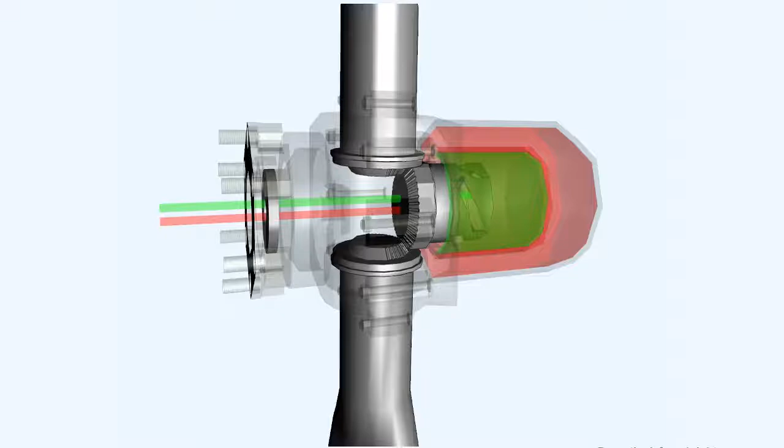Alternatively, the type of control system shown here has a similar pitch change mechanism to the single-acting propeller. Like the single-acting propeller, its pitch change mechanism is also mounted towards the front of the hub, and the cylinder also contains a hydraulic piston. However, in the double-acting system, this piston will have hydraulic pressure directed to either side of it.

Fine pitch oil is sent to one side of the piston, or coarse pitch oil is sent to the other. This eliminates the need for coarse pitch springs or gas pressure, and, with the exception of some larger propellers, the assistance of centrifugal counterweights.

The double-acting propeller's controller will respond to the various demands made by the pilot regarding the propeller RPM to control the oil flow to either side of the piston in the pitch change cylinder in three ways.

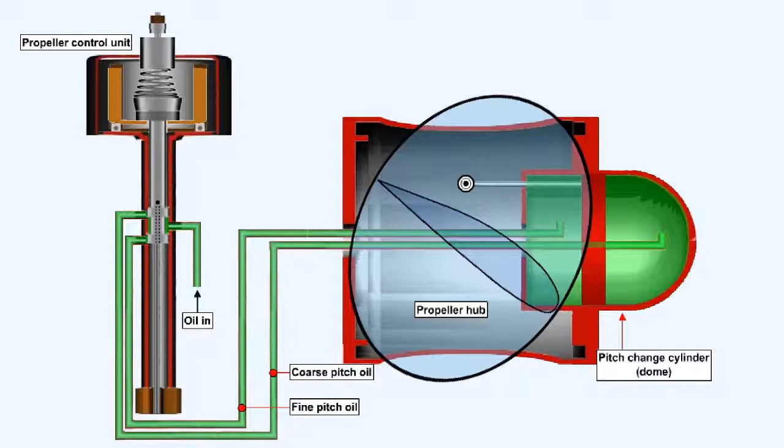If the propeller is underspeeding, then the flyweights will be leaning inwards because of the reduced centrifugal force, allowing the speeder spring to push the landed valve downwards. This will allow the unit to supply oil to fine off the pitch of the propeller, while simultaneously porting coarse oil to return. The piston will move to fine off the blades, causing an RPM increase.

If the RPM is as required, in other words the propeller is on speed, then a hydraulic lock is formed which traps oil both sides of the piston, maintaining the blade pitch constant.

If the propeller is overspeeding, then the flyweights will be forced outwards by centrifugal force, compressing the speeder spring and allowing the landed valve to move upwards. This will simultaneously allow coarse oil to be ported to one side of the piston and fine oil to drain back into the engine from the other side. The piston will move to coarsen the blade pitch, causing a decrease in RPM.

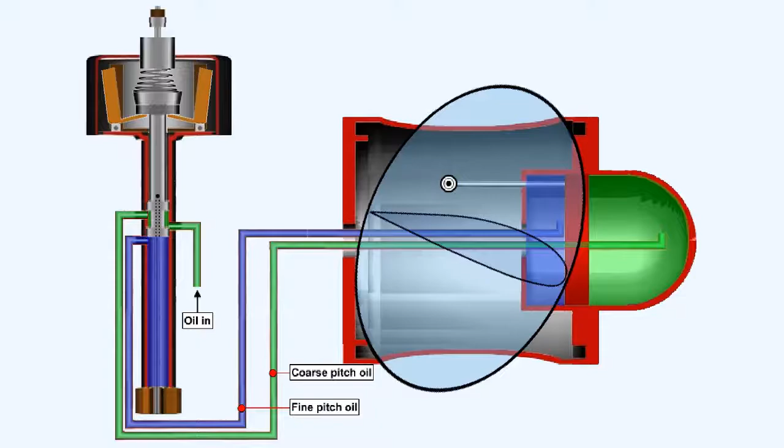A constant speed propeller must be capable of all the pitch change operations mentioned previously, as they are selected by the pilot moving the RPM lever in the cockpit. The system must also be capable of maintaining a selected RPM within its own operational limits, regardless of changes in airspeed, altitude, and engine power setting.

When the constant speed unit senses that the RPM is as has been selected, the system remains in a static state. However, any change in airspeed, altitude, or engine power setting will result in a tendency to either increase RPM above or decrease RPM below the value selected.

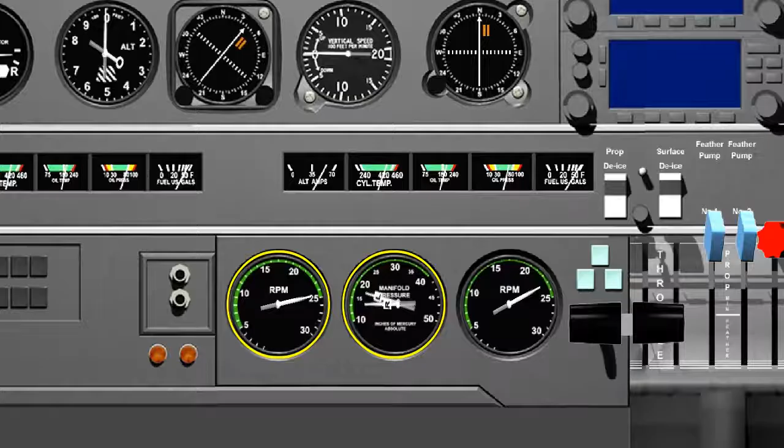As we've seen already, a tendency for RPM to increase, an overspeed condition, will be countered by a supply of oil being fed to the coarse pitch side of the piston in the pitch change mechanism. As is shown in this animation, the pitch will then coarsen and propeller torque will rise as a result of the increase in the blade angle of attack. Propeller torque now exceeds the engine torque and will cause the RPM to decrease back to the selected setting.

As the RPM regains its previously selected value, the movement of the landed valve in the constant speed unit, which directed the oil flow in the first place, is progressively reversed until it regains the sensitive position, where a hydraulic lock holds the piston in the pitch change mechanism immovable until the next RPM selection or disturbance in airspeed, altitude, or engine power setting.

A tendency for the RPM to reduce, which is termed a propeller underspeed condition, must be countered by a supply of oil being fed to the fine pitch side of the piston in the pitch change mechanism.

As shown in this animation, the pitch will fine off and propeller torque will fall as a result of the decrease in the blade angle of attack. Propeller torque is now less than engine torque and will cause RPM to increase back to the selected setting.

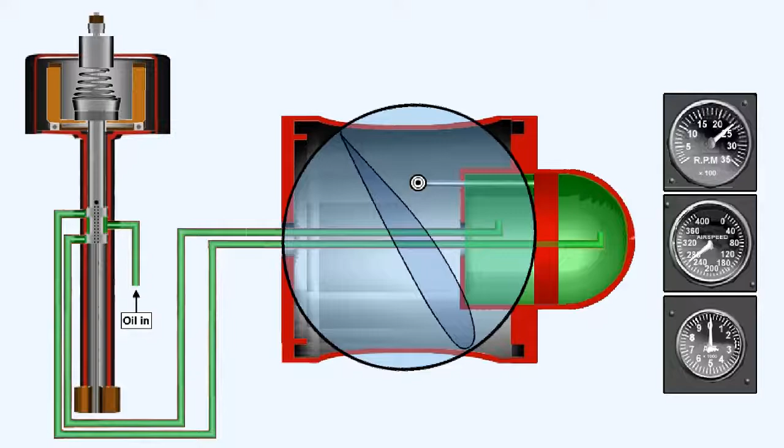Should an engine fail in flight, its propeller control unit would sense a drop in RPM, and in an attempt to maintain the pilot's selected RPM level, would move to the underspeed or fine pitch position. Centrifugal moments acting on the blade would cause it to rotate towards fine pitch.

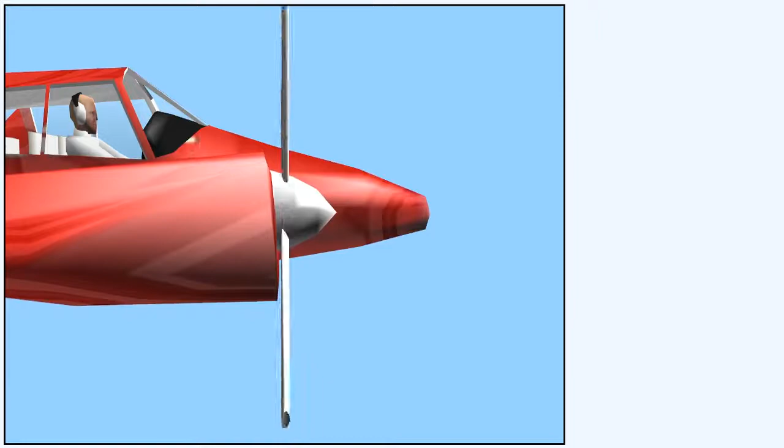This would result in the propeller being put into a windmilling situation, with its pitch change piston abutting the fine pitch stop. The immediate result of this would be a very large asymmetric drag, which would yaw the aircraft violently towards the failed engine.

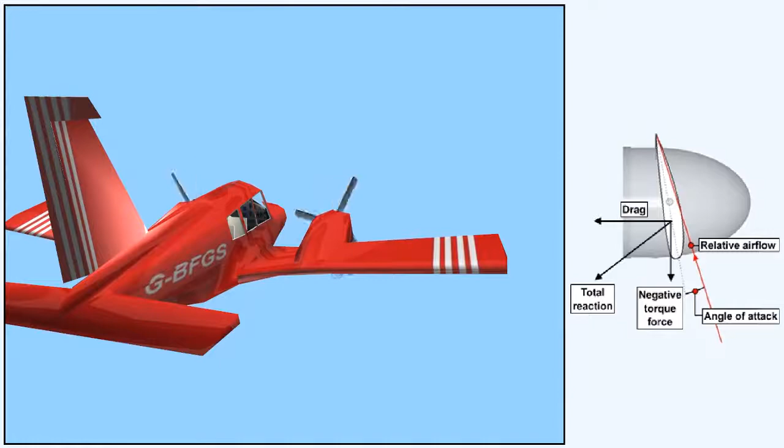A second possibility, if the propeller continued to windmill and drive the engine, could be a complete mechanical breakdown of the engine, and even an engine fire.

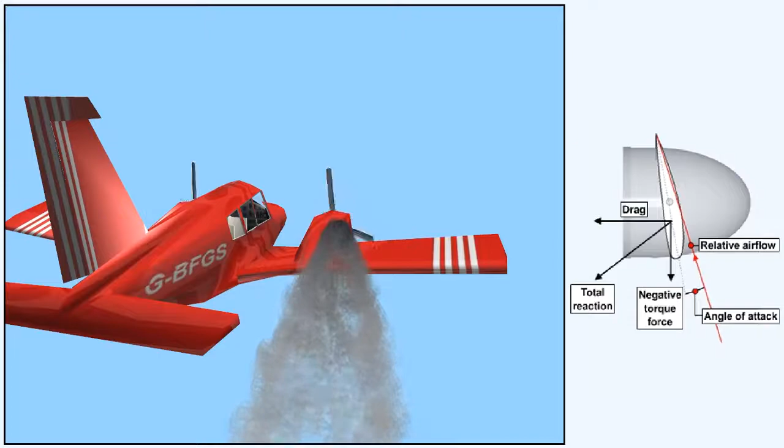So, to minimize drag, and also to prevent further possible damage to the engine and the aircraft, some propellers, particularly on multi-engine aircraft, are provided with a means of turning the blades edge-on to the air flowing over them. In this edge-on position, where no aerodynamic force is generated either forwards or backwards, the propeller will cease to rotate. This action is called feathering the propeller.

If the engine had actually failed, there would be no requirement to unfeather its propeller. However, propeller manufacturers usually provide an unfeathering facility, by means of which, if appropriate, an engine restart may be attempted. This may be a requirement following asymmetric flight practice.

The operating principle of the propeller control unit incorporated in a feathering propeller is similar to that previously discussed, in that the unit contains an oil pump to boost oil pressure delivered from the engine or reduction gearbox, and a hydromechanical governor for RPM control. There is, however, the addition of a feathering mechanism, the operation of which will be discussed progressively throughout the lesson.

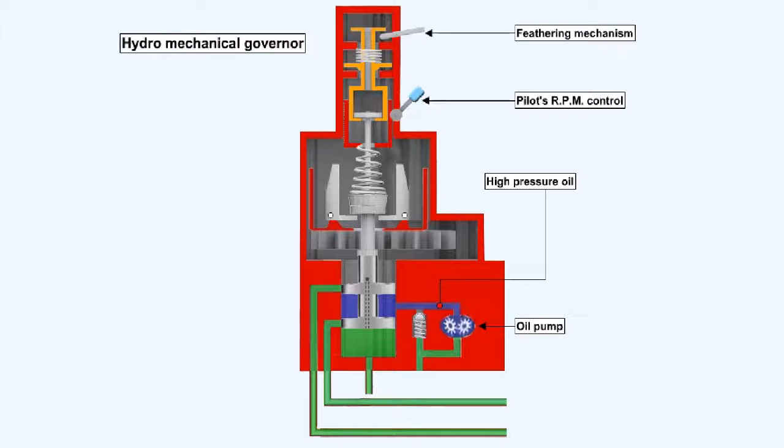Control units with feathering mechanisms may be found on both turboprop or reciprocating aero engines. Dependent on the manufacturer and type of propeller system, the controller may be known as a propeller governor, a constant speed unit (CSU), or a propeller control unit (PCU). For the remainder of this lesson, we'll refer to the unit as the propeller control unit, or PCU.

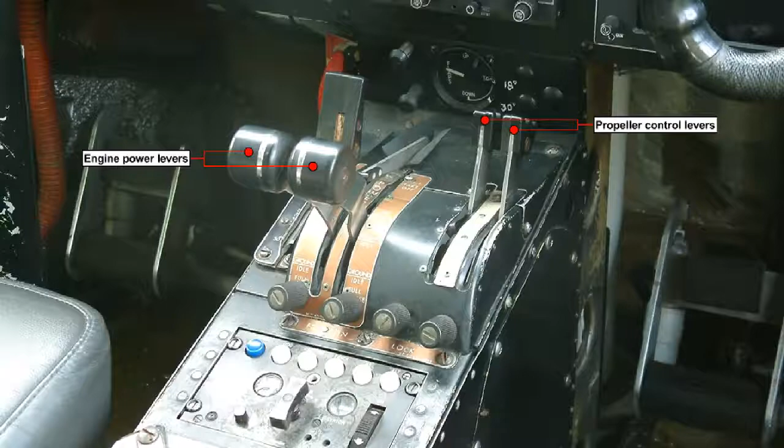The controls available to the pilot are, again, dependent on type. Most spark ignition piston engines, and many turboprop engines, are equipped with a twin-lever cockpit arrangement, whereby the pilot has separate engine power and propeller control levers. In this arrangement, propeller feathering can be manually achieved by moving the propeller control lever to the feather position, or on some aircraft, by means of a separate feather lever.

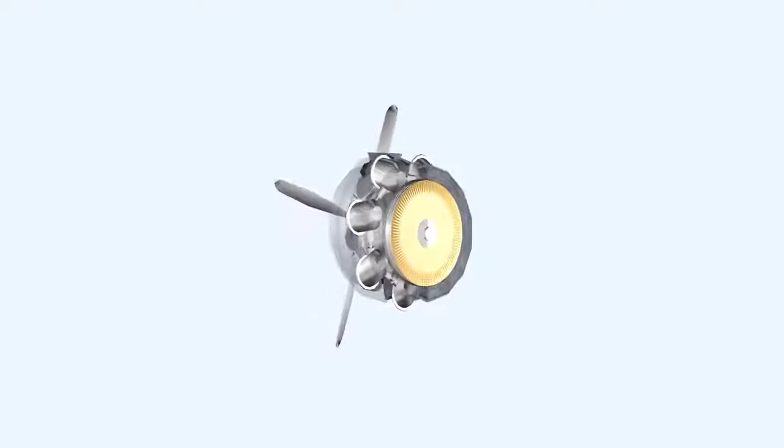Some turboprop engines utilize a single lever arrangement, whereby the pilot is provided with a power lever only. In this arrangement, propeller pitch, RPM, and engine fuel flow (power) are simultaneously adjusted. Feathering may be achieved by moving the engine high-pressure fuel cock to the feather position.

New generation reciprocating engines equipped with Full Authority Digital Engine Control, or FADEC, also use a single lever arrangement, whereby the pilot selects the required power setting and the propeller pitch angle is controlled either electronically by an electronic engine control unit or by a hydromechanical control unit.

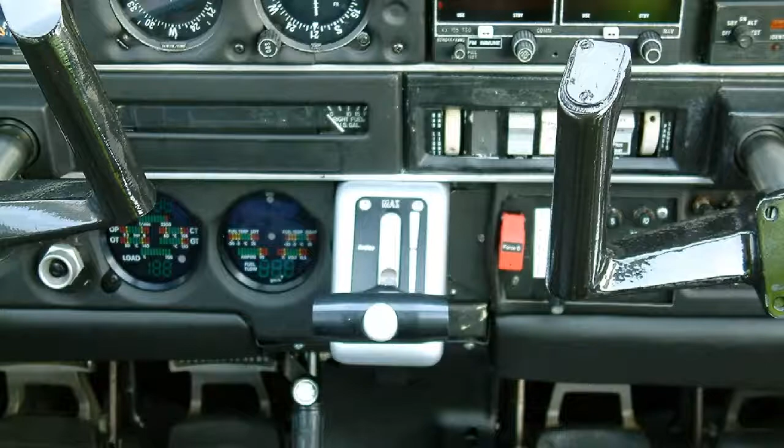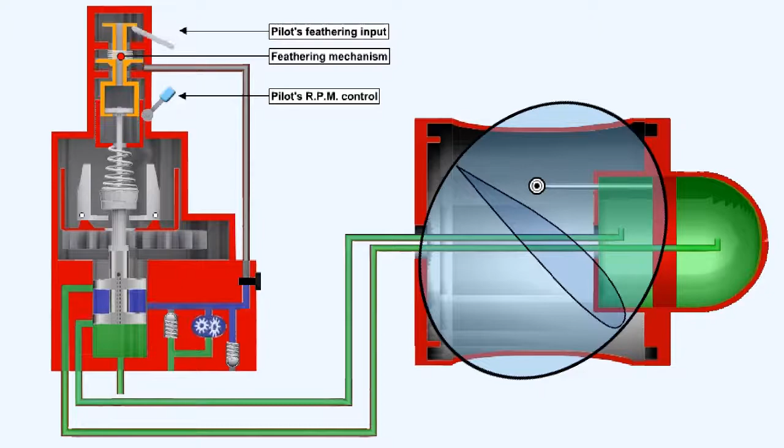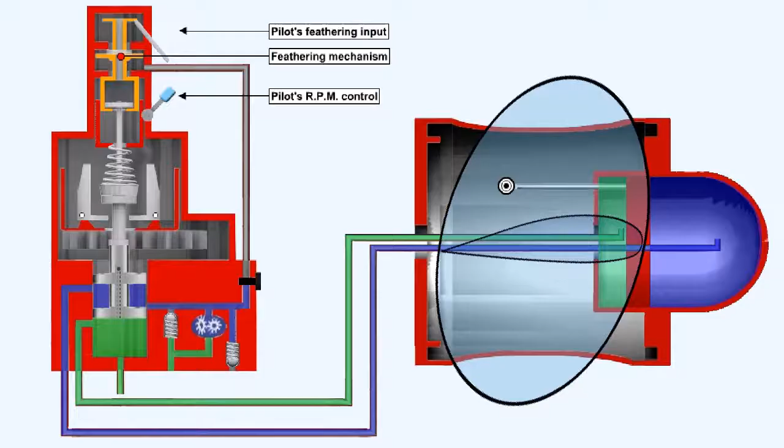The feathering mechanism provides a means of manually lifting the pilot valve to the overspeed or coarse pitch condition when the appropriate control is moved to the feather position. The actions required to feather a propeller are dependent on the type of engine and propeller combination and the type of aircraft they are installed in.

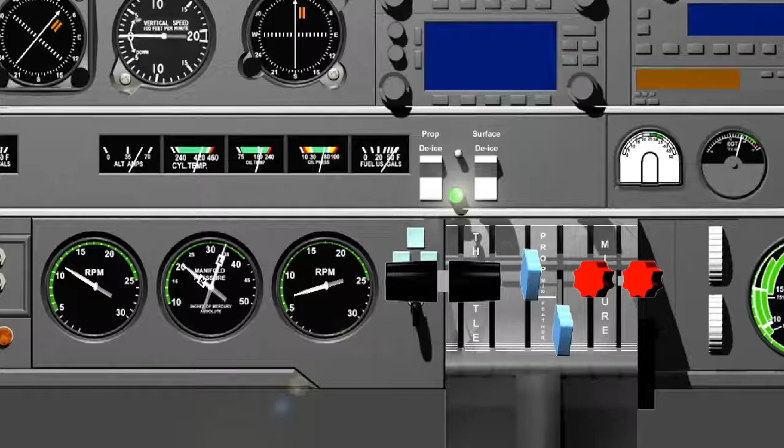For single-acting propellers, this normally involves moving the propeller condition lever, or RPM lever, to the feather position. Moving the appropriate lever to the feather position mechanically lifts the landed valve against the speeder spring to its highest position, thereby simulating an exaggerated overspeed condition. The landed valve will remain in this position until the feathering control is moved back to its normal position.

Any oil in the pitch change cylinder can now drain away, allowing the spring or gas pressure, assisted by counterweights, to move the piston onto the feathering stop.

To unfeather the propeller, the speeder spring tension is released by moving the propeller control lever to a position comparable to that of the serviceable engine, which of course is running at normal operating RPM. This moves the landed valve down and connects the reserve oil pressure line to the fine pitch side of the propeller pitch change cylinder.

A reserve of oil pressure may be supplied by means of an accumulator, which is charged continuously during normal operation. By activating a release valve, oil pressure from the accumulator is directed to move the pitch change piston to fine pitch.

Alternatively, some systems may utilize an electrically operated unfeathering pump, or, on some smaller systems, the engine may require motoring over on the starter to build up sufficient oil pressure.

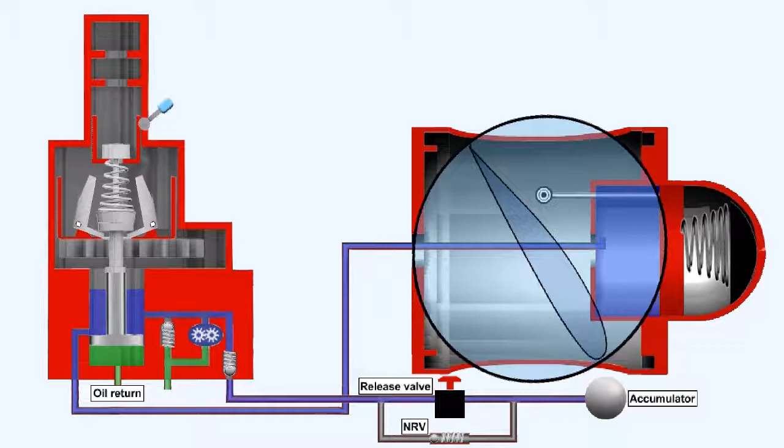Once the propeller blades have moved away from the feathered position, the propeller will start to windmill, and as long as the engine has fuel and ignition, it should start.

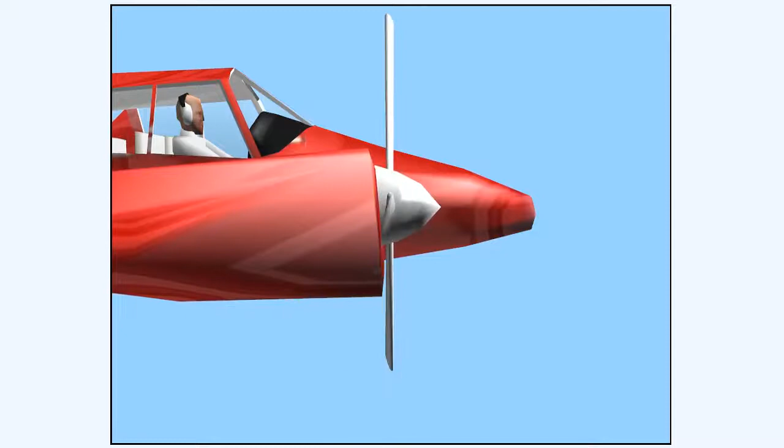When an engine, which is fitted with a single acting propeller, is shut down after flight, the propeller should be at the fully fine pitch position.

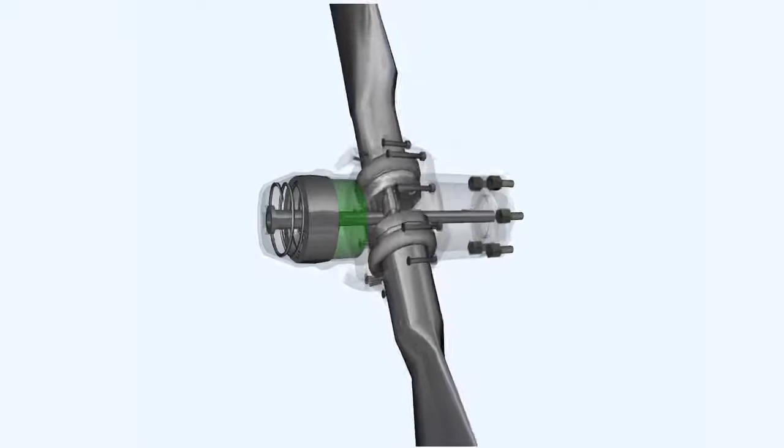There is a considerable quantity of oil trapped under pressure on the fine pitch side of the piston in the pitch change cylinder, which is holding the propeller in the fully fine position. This oil pressure is being opposed by the force of the feathering spring.

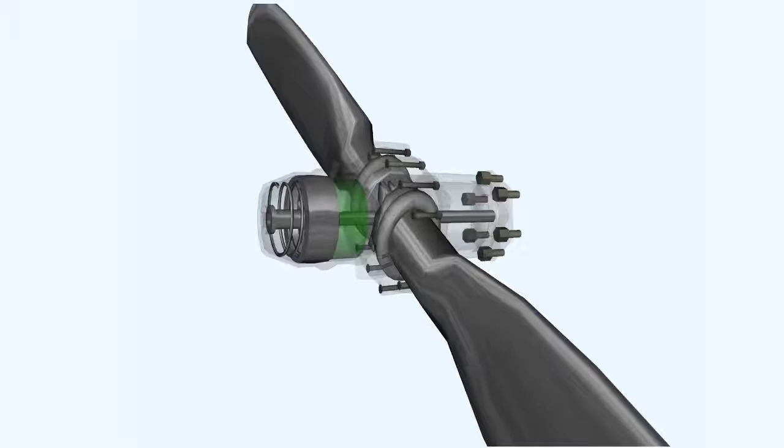After engine shutdown, the trapped pressure will gradually leak away past the landed valve in the constant speed unit. As this trapped hydraulic pressure leaks away, the feathering spring is able to slowly push the propeller blades towards the fully feathered position.

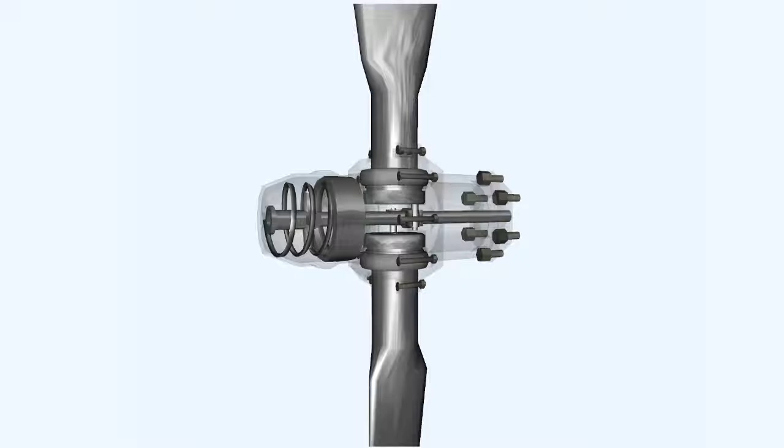While this condition would be acceptable to a turboprop with a free power turbine, it would result in an unacceptably high loading on the starter motor of a piston engine or direct coupled turboprop.

So, to prevent the feathering spring pushing the blades all the way to the feathered position, on those engines where a feathered propeller would cause stress on startup, centrifugal latch pins are incorporated in the pitch change mechanism.

The latch pins are held disengaged by centrifugal force while the engine is running. As the engine RPM reduces, small springs behind the latch pins overcome centrifugal force, and they are allowed into contact with the piston mechanism. Typically, the value of the RPM at which the latch pins become engaged is around 650 to 700.

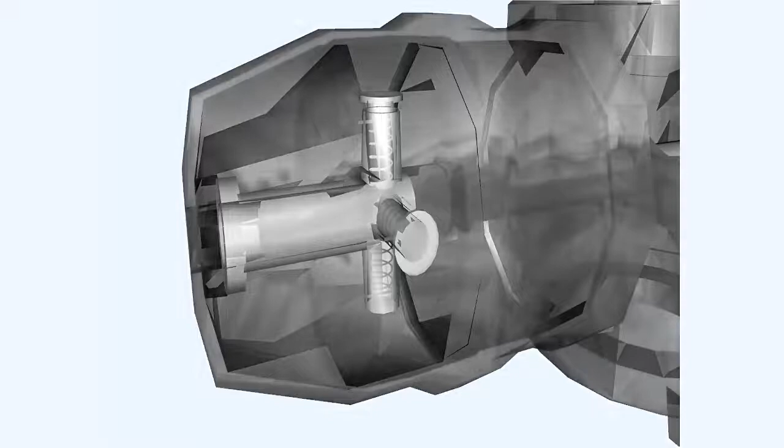After engine shutdown, the latch pins engage with a groove in the piston mechanism, which locks the piston. This prevents it from being pushed beyond a predetermined blade angle, and further into the feathered position by the feathering spring.

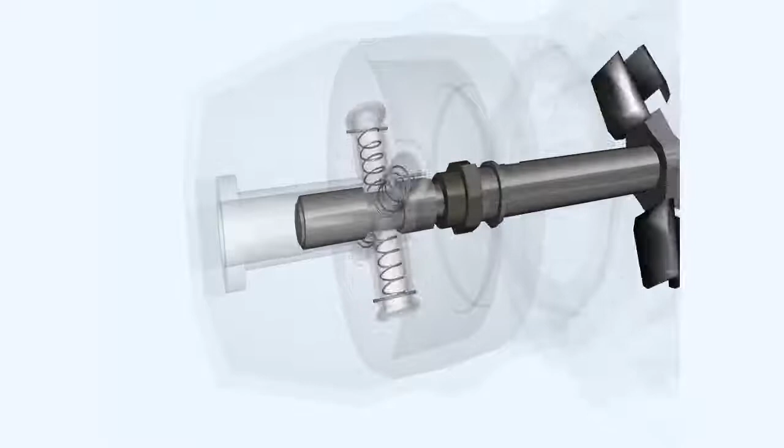When the engine is started and RPM increases, centrifugal force will disengage the latch pins. Fine pitch oil will quickly build up and hold the propeller against the fine pitch stop.

Note that if a propeller engine combination does have a centrifugal latch mechanism fitted, it may become impossible to feather the propeller of that engine once its RPM has fallen below the latch setting value.

This is because once they are engaged, the latch pins can prevent the piston being moved any further by the feathering spring. It is thus extremely important to complete the feathering drill before the RPM decays below this figure.